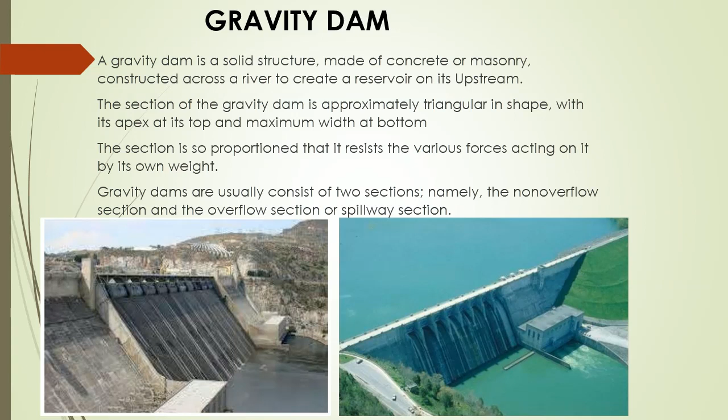The section is so proportioned that it resists the various forces acting on it by its own weight. Gravity dams usually consist of two sections, namely, the non-overflow section and the overflow section or spillway section.

Length of the dam is the distance from one abutment to the other, measured along the axis of the dam at the level of the top of the dam.

Structural height of the dam is the difference in elevations of the top of the dam and the lowest point in the excavated foundation. However, it does not include the depth of special geological features of foundations such as narrow fault zones below the foundation. In general, the height of the dam means its structural height.

Toe and heel. The toe of the dam is the downstream edge of the base, and the heel is the upstream edge of the base.

Maximum base width of the dam is the maximum horizontal distance between the heel and the toe of the maximum section of the dam in the middle of the valley.

Hydraulic height of the dam is equal to the difference in elevations of the highest controlled water surface on the upstream of the dam and the lowest point in the riverbed.

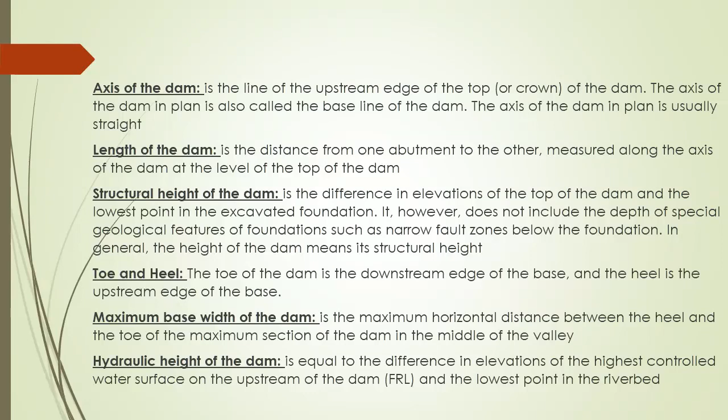Spillway is a structure over or through which flood flows are discharged. Gallery is a passageway within the body of a dam or abutment for inspection and drainage purposes.

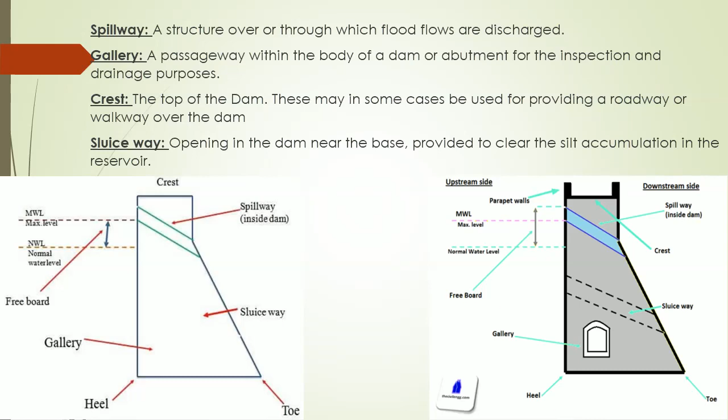Crest is the top of the dam. This may in some cases be used for providing a roadway or walkway over the dam. Sluiceway is an opening in the dam near the base, provided to clear the silt accumulation in the reservoir.

Next, we have to discuss about the factors affecting site selection of dams. Topographically, the most suitable place must be chosen for construction. Ideally, it must be a narrow gorge, or a small valley with enough catchment area available behind, so that the calculated amount of water can be easily stored in the reservoir created upstream.

All dams should have an adequate spillway for passing flood flows. If a river gorge is narrow, then there may not be sufficient spillway width available, and a suitable location on the periphery of the reservoir has to be found to locate a spillway.

The way through which the river can be diverted at a particular site for making way for construction of the dam may affect the design of the dam and also the construction schedule.

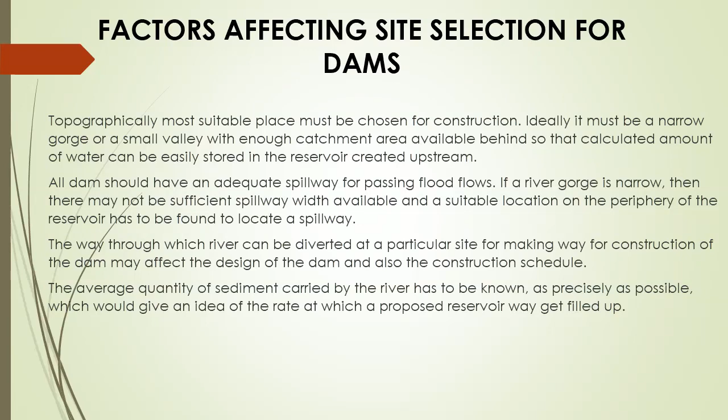The average quantity of sediment carried by the river has to be known as precisely as possible, which would give an idea of the rate at which a proposed reservoir may get filled up.

Site selection should be done in such a way that it must cause minimum damage to the public in the event of destruction or failure. Technically, the site must be as sound as possible, that is, strong, impermeable and stable.

Strong rocks make the job of the designer easy. Impermeable sites ensure better storage inventories. The site must be stable with respect to seismic shock and slope failures around the dam.

The site should not be far from the locations where materials which will be used for the construction are available. Their non-availability will make the cost of the project high.

The creation of the dam must not create ecological disorder. Fish culture is the first sector that suffers the major shock due to dam construction, and it indirectly affects the other population. The dam should become an acceptable element of the ecological setup of the area.

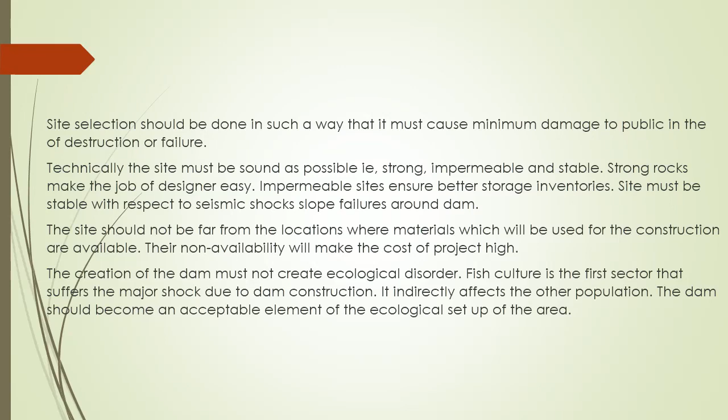Now we are going to discuss about the advantages of gravity dams. The advantages are: gravity dam is strong, stable, and durable.

Gravity dams are suitable for moderately wide valleys having steep slopes. They can be constructed to very great heights, are suitable for an overflow spillway section, and maintenance cost is very low.

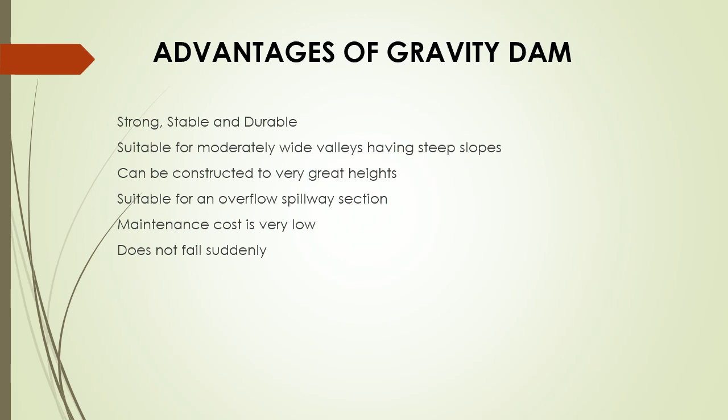Gravity dams do not fail suddenly. Disadvantages of gravity dams are: gravity dams of great height can be constructed only on good rock foundations. Initial cost is more than earth dam, they take longer time in construction, require more skilled labor than earth dam, and subsequent raise is not possible in a gravity dam.

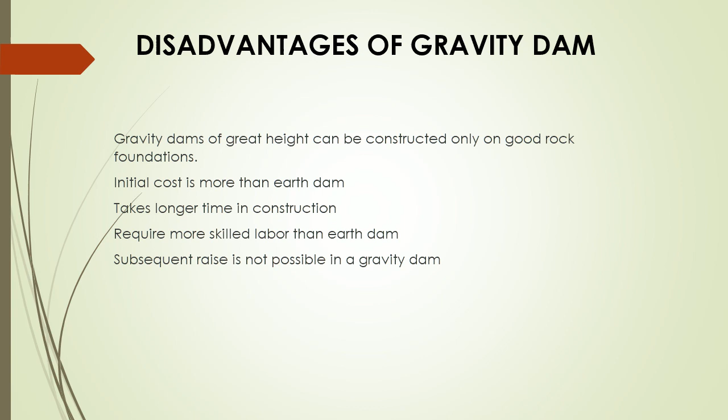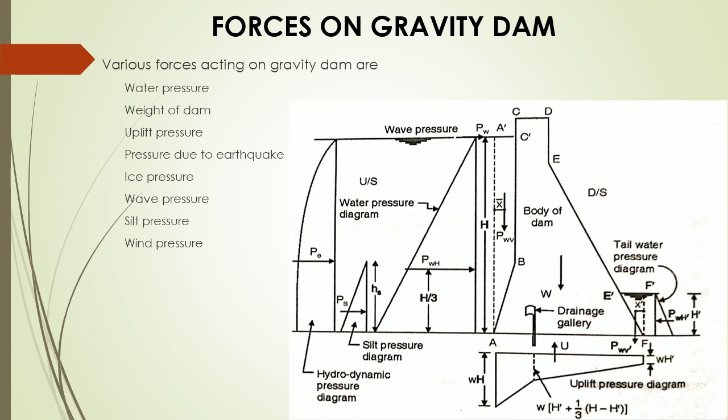Water pressure on the upstream face is the main destabilizing force acting on a gravity dam. Tailwater pressure on the downstream side helps in the stability of the dam. The water pressure always acts normal to the face of the dam.

It is convenient to determine the components of the forces in horizontal and vertical directions instead of the total forces on the inclined surface directly. The water pressure intensity varies linearly with the depth of water measured below the free surface.

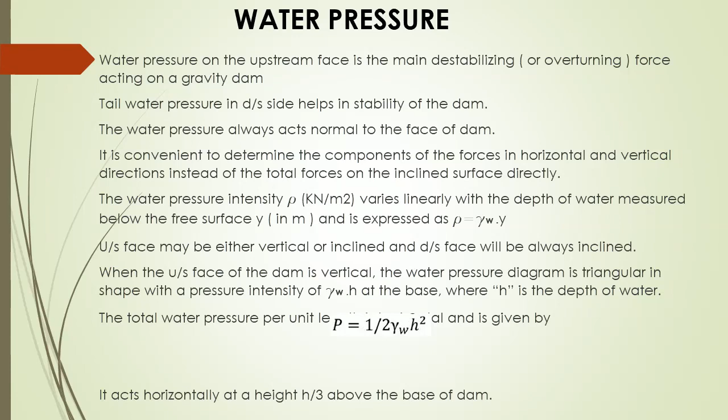The upstream face may be either vertical or inclined, and the downstream face will always be inclined. When the upstream face of the dam is vertical, the water pressure diagram is triangular in shape. The total water pressure per unit length is horizontal and it acts at a height h/3 above the base of the dam. The figure shows the distribution of pressure due to water.

Next force is weight of dam. The self-weight of the gravity dam is the main stabilizing force which counterbalances all the external forces acting on it.

For construction of gravity dams, the specific weight of concrete and stone masonry should not be less than 2,400 kg per m³ and 2,300 kg per m³ respectively. The self-weight of the gravity dam acts through the center of gravity of the dam. It is calculated by the following formula given here.

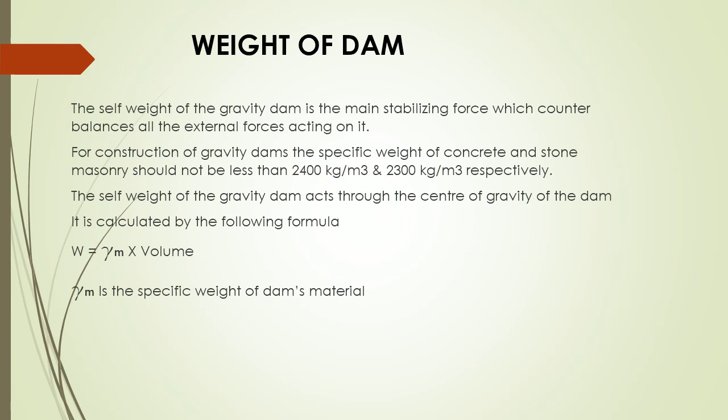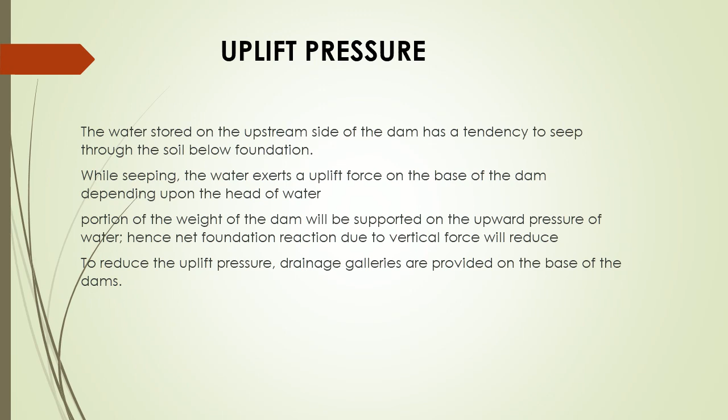The water stored on the upstream side of the dam has a tendency to seep through the soil below the foundation. While seeping, the water exerts an uplift force on the base of the dam, depending upon the head of water. Portion of the weight of the dam will be supported on the upward pressure of water, hence net foundation reaction due to vertical force will reduce. To reduce the uplift pressure, drainage galleries are provided on the base of the dams.

Dams are subjected to vibration during earthquakes. Vibration affects both the body of the dam as well as the water in the reservoir behind the dam. The most dangerous effect occurs when the vibration is perpendicular to the face of the dam. Body forces act horizontally at the center, and water vibration produces a force on the dam acting horizontally.

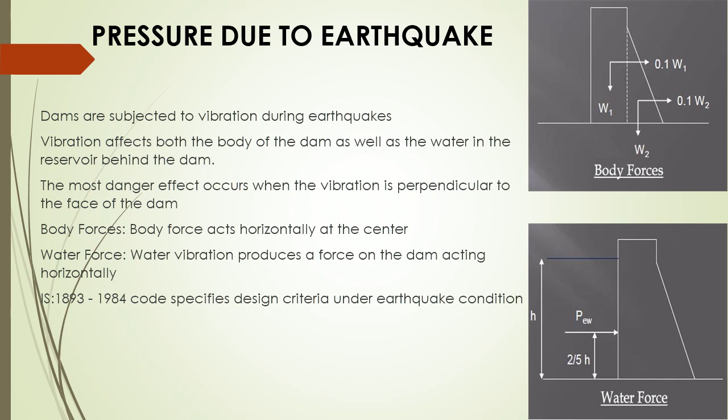IS 1893/1984 code specifies design criteria under earthquake condition.

Next one is ice pressure. Ice expands and contracts with changes in temperature. In a reservoir completely frozen over, a drop in the air temperature or in the level of the reservoir water may cause the opening up of cracks, which subsequently fill with water and get frozen. When the next rise in temperature occurs, the ice expands and, if restrained, it exerts pressure on the dam.

Good analytical procedures exist for computing ice pressures, but the accuracy of results is dependent upon certain physical data which have not been adequately determined. Ice pressure may be provided for at the rate of 250 kPa, applied to the face of the dam over the anticipated area of contact of ice with the face of the dam.

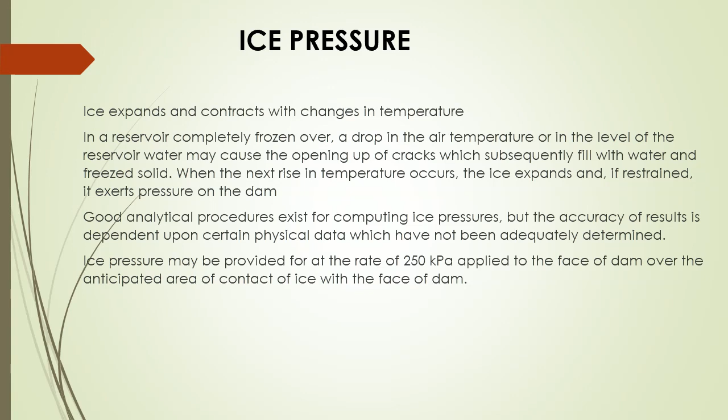When very high wind flows over the water surface of the reservoir, waves are formed which exert pressure on the upstream part of the dam. The magnitude of waves depends upon the velocity of wind, depth of reservoir, and area of water surface. Calculation of wave pressure according to Indian standards are explained here.

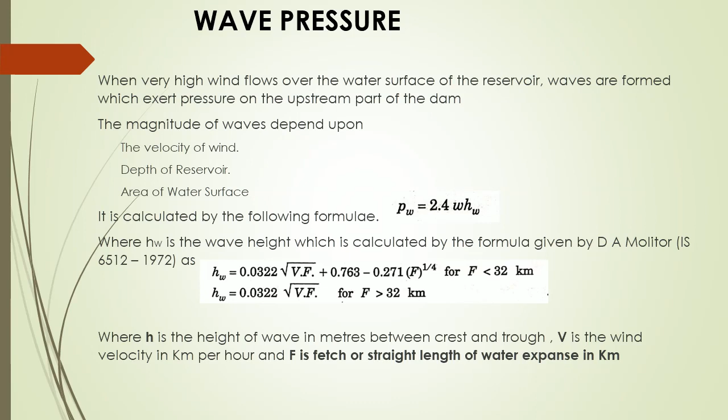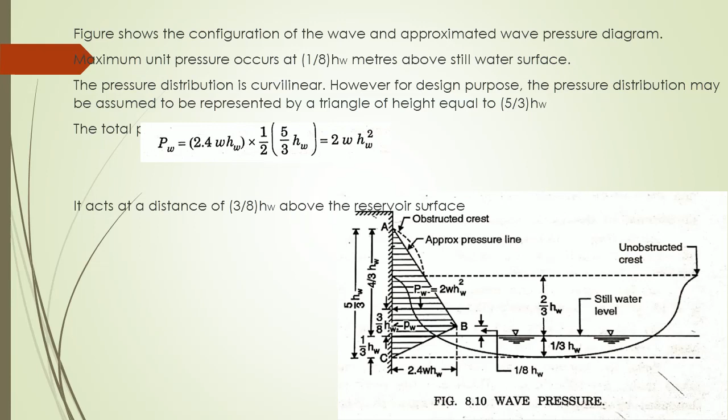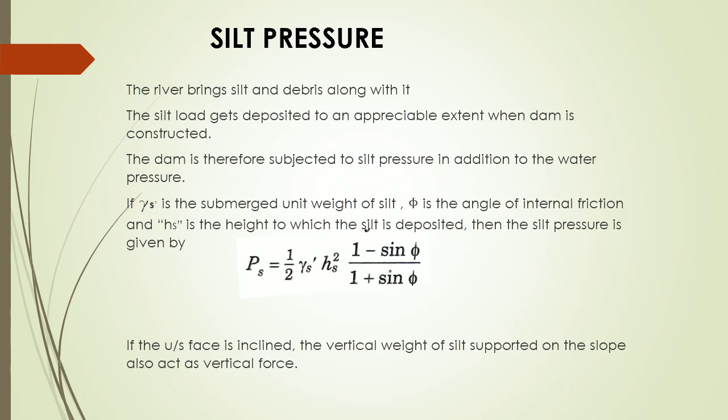The river brings silt and debris along with it. The silt load gets deposited to an appreciable extent when the dam is constructed. The dam is therefore subjected to silt pressure in addition to the water pressure. Silt pressure is calculated according to the formula given here.

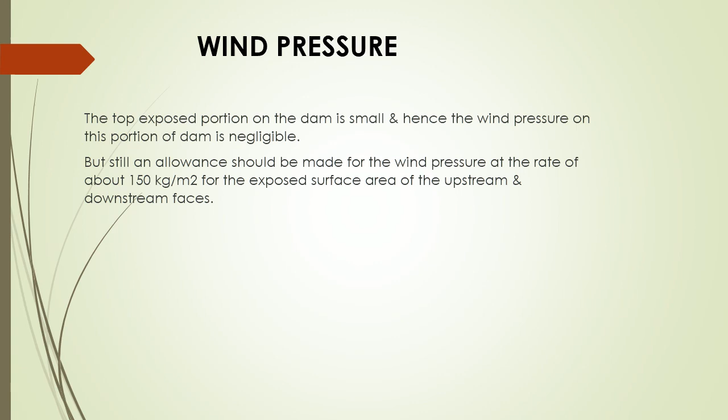Wind pressure: the top exposed portion of the dam is small, and hence the wind pressure on this portion of the dam is negligible. But still an allowance should be made for the wind pressure at the rate of about 150 kg per m² for the exposed surface area of the upstream and downstream faces.

Thank you for watching the first part of gravity dams. Now go to the second part of gravity dam for the following topics.

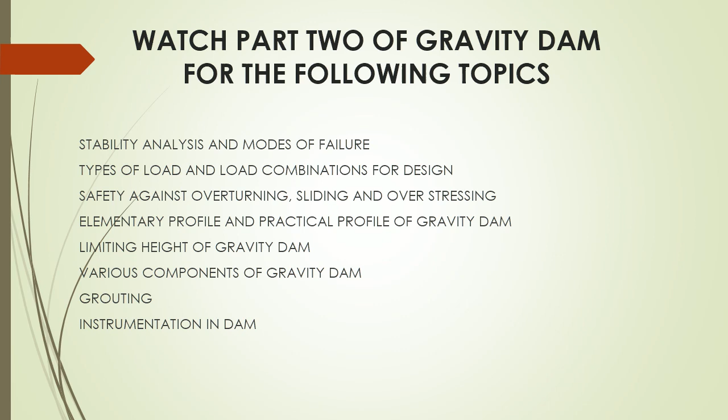Stability analysis and modes of failure. Types of load and load combinations for design. Safety against overturning, sliding, and overstressing. Elementary profile and practical profile of gravity dam. Limiting height of gravity dam. Various components of gravity dam. Grouting. Instrumentation in dam.